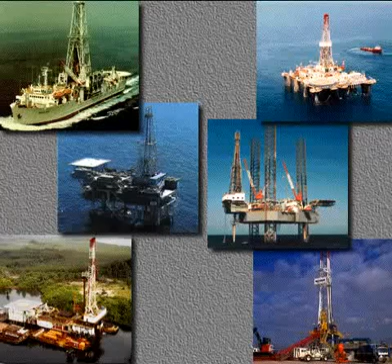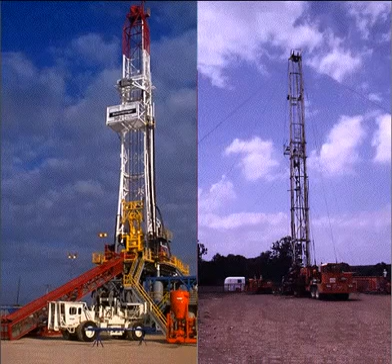Drilling rigs like these bore or drill holes into the earth, usually to find oil and gas. They work both on land and offshore. Some are big and some are relatively small. Big rigs drill very deep holes, 20,000 feet or 6,000 meters or more, while small rigs may only drill to a few thousand feet or meters.

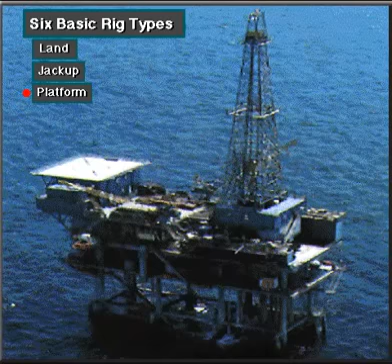People in the oil industry group rigs into 6 basic types: land, jackup, platform, submersible, semi-submersible, and drill ship.

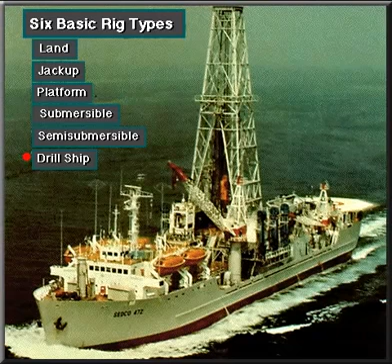A land rig drills on dry land. They're the most common rig. Light-duty rigs drill holes from about 3,000 to 5,000 feet deep, or 1,000 to 1,500 meters. Medium-duty rigs drill to depths ranging from about 4,000 to 10,000 feet, or 1,200 to 3,000 meters. Heavy-duty rigs drill holes from about 12,000 to 16,000 feet deep, or 3,500 to 5,000 meters. Ultra-heavy-duty rigs drill holes from about 18,000 to 25,000 feet or more, 5,500 to 7,500 meters or more.

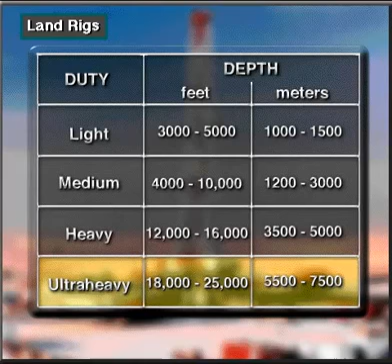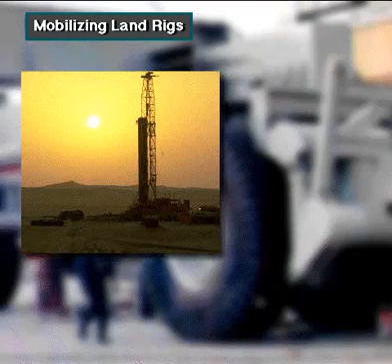Crew members can move land rigs on trucks, tractors, trailers, barges, helicopters, heavy rolling gear, skids, and, in rare cases, on specialized air-pressurized equipment. Small, light-duty rigs are pretty simple to move, while ultra-heavy land rigs can be difficult to move.

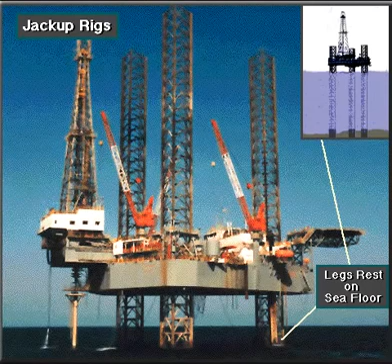A jackup rig drills offshore wells. It has legs that support a deck and hull. When positioned over the drilling site, the bottom of the legs rest on the seafloor. Jackup rigs can drill in water depths ranging from a few feet or meters up to more than 400 feet, over 120 meters.

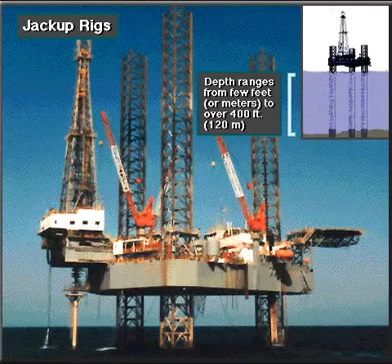Boats tow a jackup rig to a location with its legs up. Once the rig-up crew gets the legs firmly positioned on the bottom of the ocean, they can adjust and level the deck and hull height.

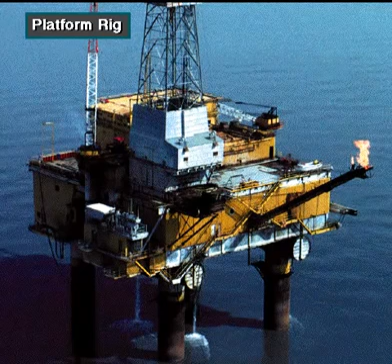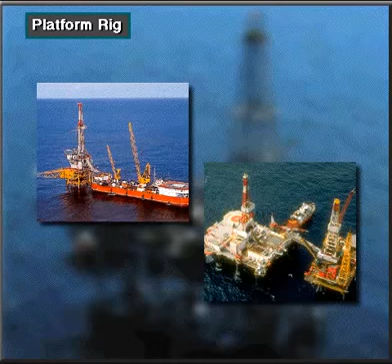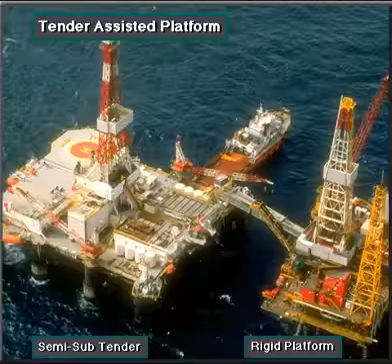A platform rig is an immobile offshore structure. That is, once built, it never moves from the drill site. Companies drill several wells from the platform. Platform rigs can be tender-assisted, where the tender floats next to the rigid platform, which is firmly pinned to the seafloor. Many platform rigs do not have a tender; they are so large that they are self-contained.

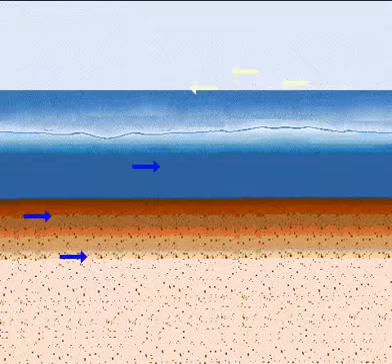Big platform rigs include the steel jacket platform, the caisson type, and the concrete gravity type. In deep water, rig builders have to make platforms that yield to water and wind movements. Two compliant platform rigs are the guyed tower and the tension leg.

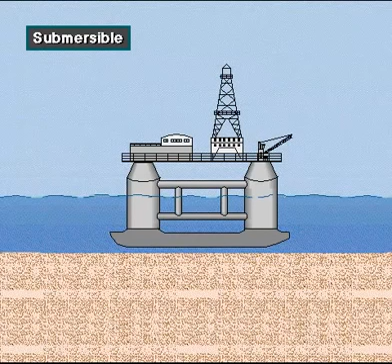A submersible rig rests on the seafloor when it is drilling. Workers flood compartments that cause the rig to submerge and rest on the bottom. When ready to move, workers remove the water from the compartments. This makes the rig float. Boats can then tow the rig to the next site.

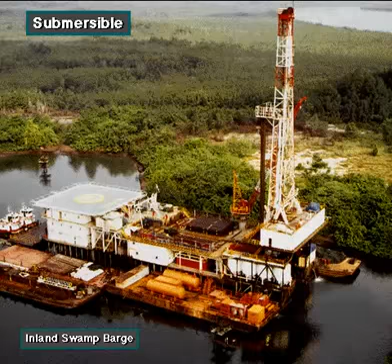Rig builders design submersibles to drill in shallow water and in water up to about 175 feet deep, a little over 50 meters. Submersible drilling rigs include the posted barge submersible, bottle-type submersible, and the Arctic submersible.

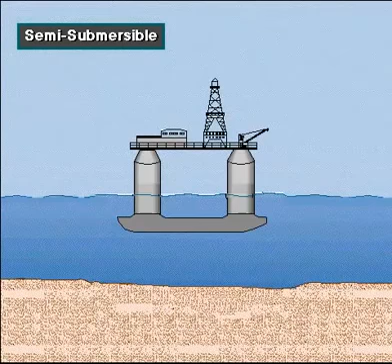A semi-submersible rig is a floating offshore drilling rig. It has pontoons and columns. When flooded with water, the pontoons cause the unit to partially submerge to a predetermined depth. The working equipment is assembled on deck.

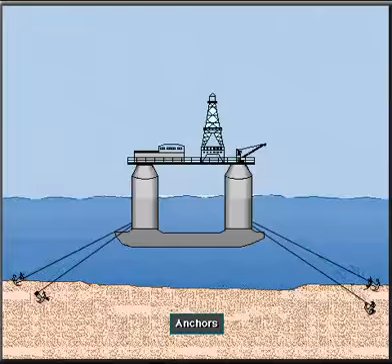On the drill site, workers can either anchor the rig to the seafloor or use a system of thrusters and positioners to keep the rig over the hole. Here, they have it anchored. Crew members mount the wellhead and blowout preventers on the ocean floor. Special hollow pipe, called riser pipe, connects the top of the blowout preventer to the rig.

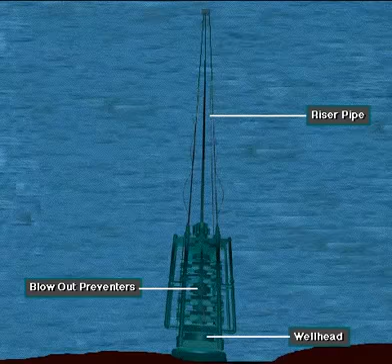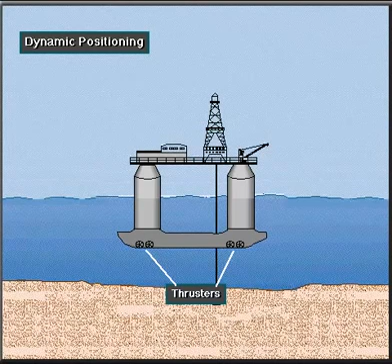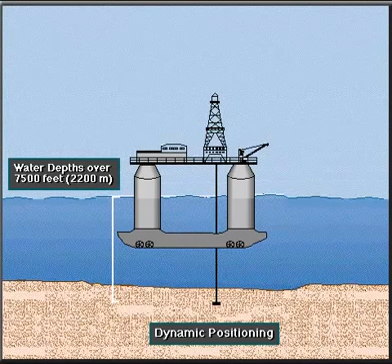In some cases, the crew uses thrusters to keep the rig over the hole. Called dynamic positioning, the thrusters, which are connected to an onboard computer, keep the rig in position. Some dynamically positioned semi-submersibles can drill in water depths of more than 7,500 feet, or over 2,200 meters. When keeping a rig over the hole, drilling crews use the term on station.

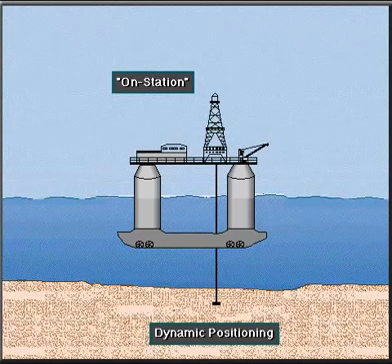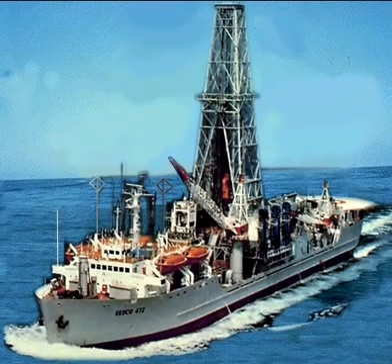A drill ship is a self-propelled floating offshore drilling unit. It usually uses a subsea blowout control system similar to the one on a semi-submersible.